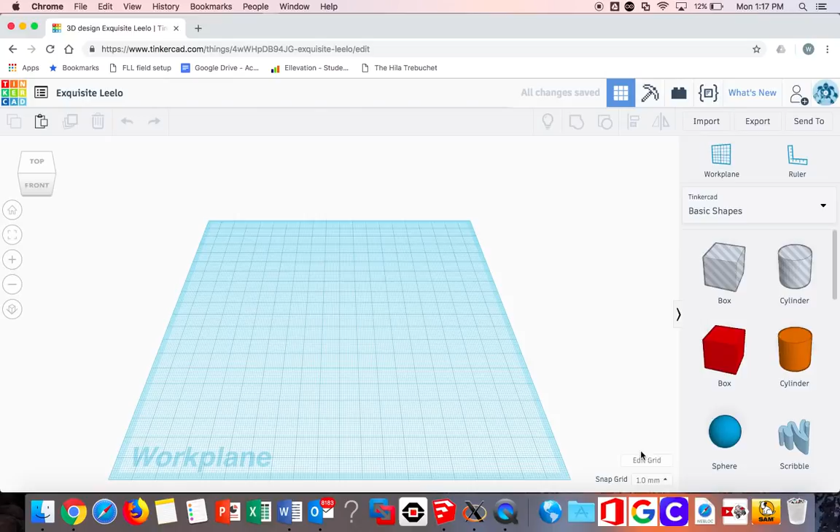Create a new design. We're going to set up your Tinkercad file by editing the grid, changing millimeters to inches,

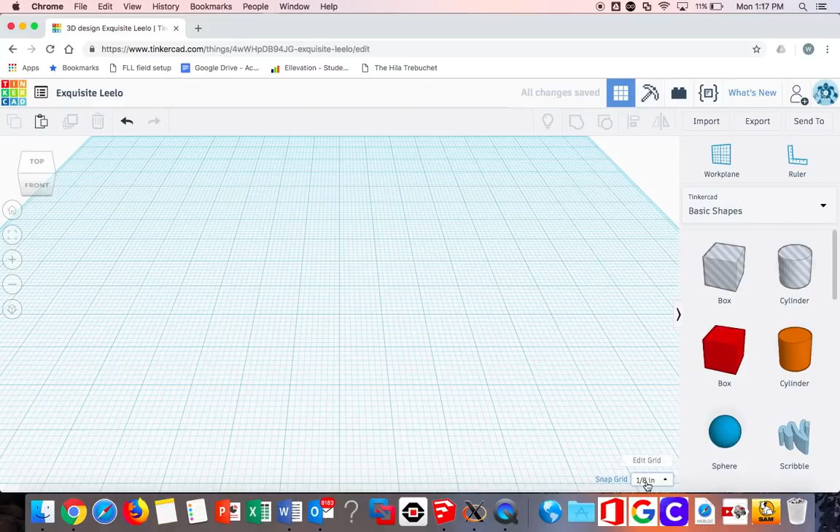and give yourself a work plane that's 20 by 20. Update grid. Make sure down here the snap is 1/8 of an inch, and it might help to use a mouse.

First thing you're going to do is drag out a box and just make it bigger. When you scale your box, the easiest way to do so is to click on the dimensions and type in whatever it is that you want. In this case, I'm going to make my jewelry box 8 inches by 8 inches and hit enter.

That looks good. Next, we're going to duplicate it, and that made an exact copy of my original box.

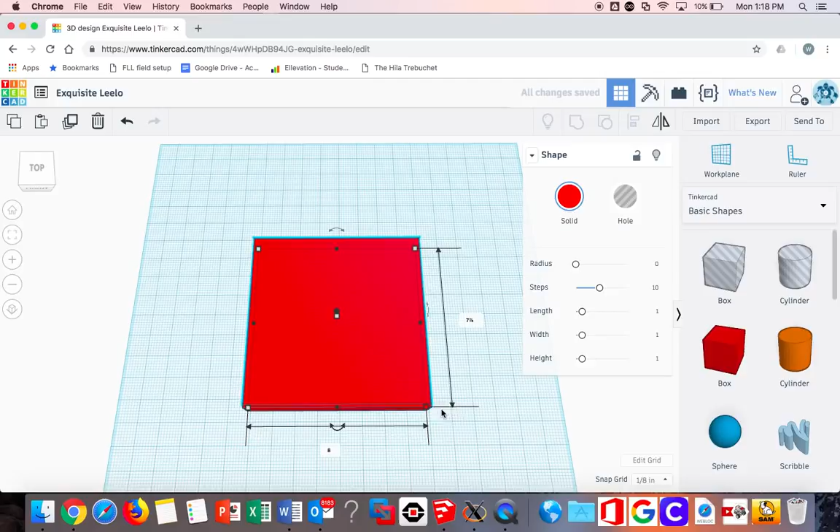So what we're going to do is push in the sides 3/8 of an inch, giving them correct thickness. Three-eighths of an inch is exactly 3 snap units.

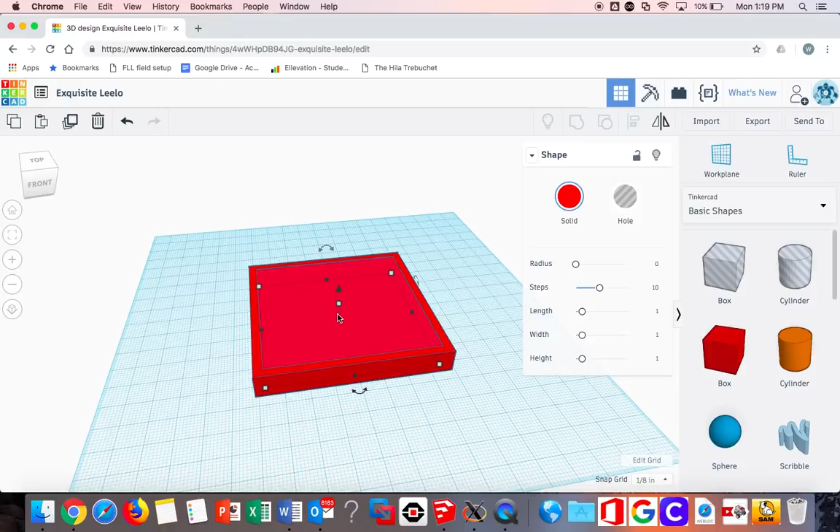Make sure everything looks even. Make sure you have your inside box selected. Make it a hole. Raise it up a little bit. Grab the little cone and make sure that it pushes all the way through your box. Make sure everything's nice and even.

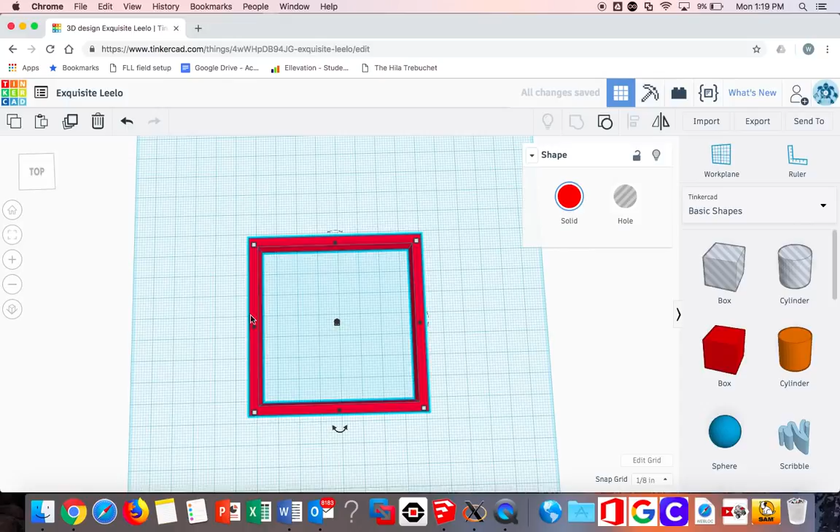Select it all. Click group. Here's the outside walls of your jewelry box. You can scale it from now on to meet whatever the criteria are or the goals for your jewelry box.

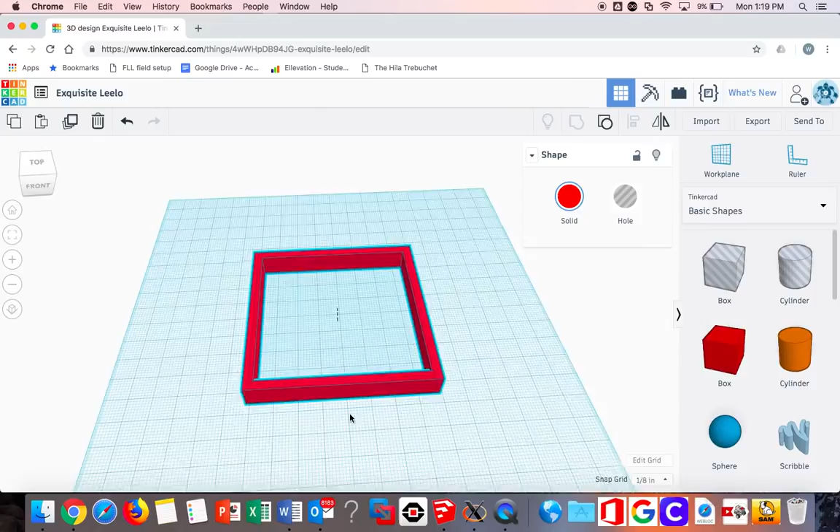So what we're going to do now is focus on the height. I'm going to make mine 2 inches. You can make yours whatever height you want. Make sure to have a ruler sitting next to you, so when you prototype and test out different ideas, you can make sure that they're going to be the right dimension.

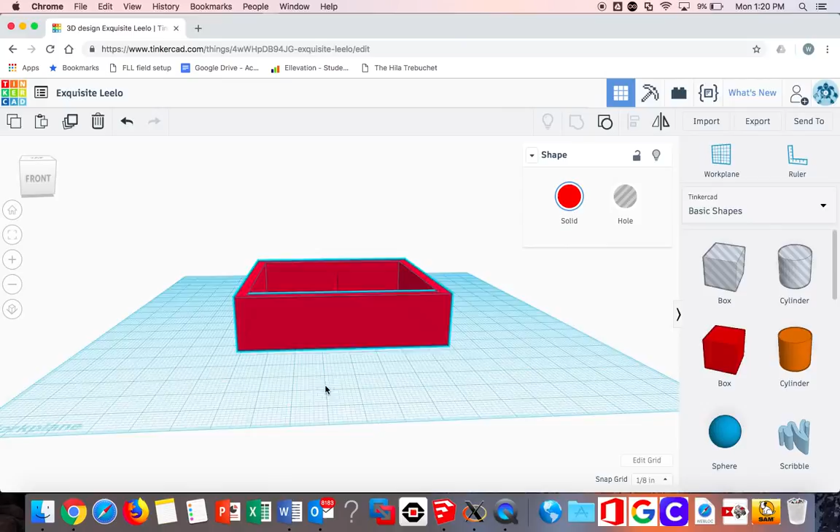I'm going to put in some dividers. Pulling out a box, making it only 1/8 of an inch thick, and stretching it out. You can use the arrows to go ahead and move your dividers around.

Your dividers can be arranged in any which way you need, depending on what you're designing your box for and what your client needs. What are their criteria?

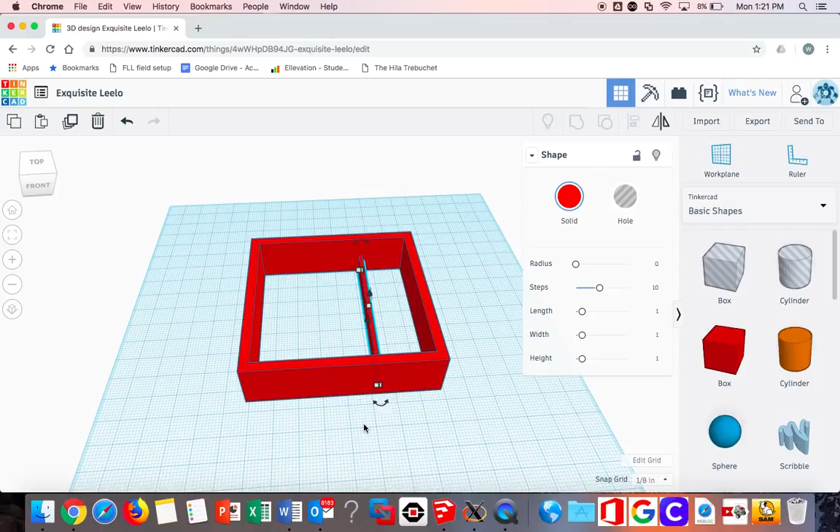Make sure to have your dividers be even with the wall. Try not to have them pushed in. We're going to be using this as a blueprint to build your design. So when you slide your dividers in, make sure that they're the same length as the interior length on the inside. So I'm going to raise them up a little bit.

I'm going to make my dividers be 1.5 inches tall.

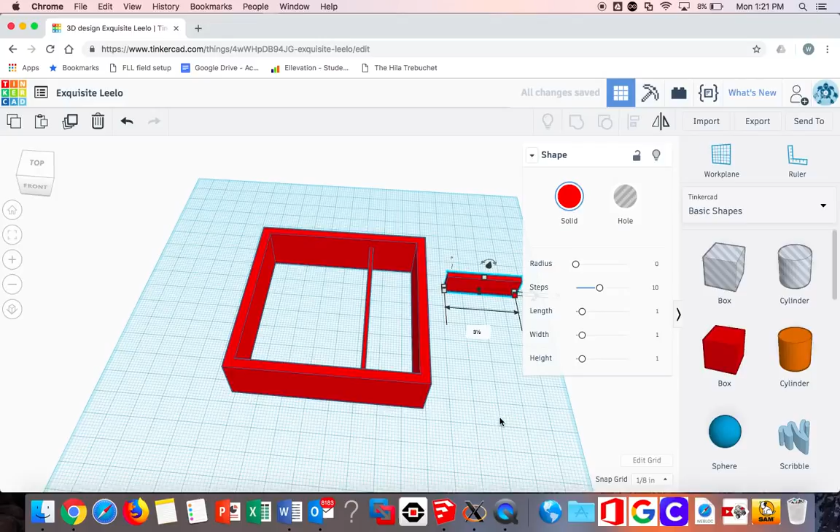Going to pull out another piece and make another divider. Again, I'm going to make it 1/8 of an inch thick. And you don't need to be too concerned with getting the size of it right until you park it inside your box.

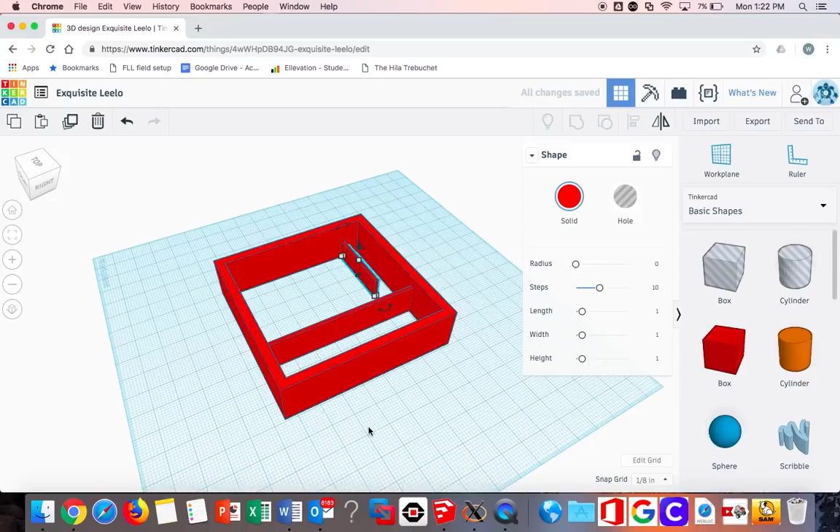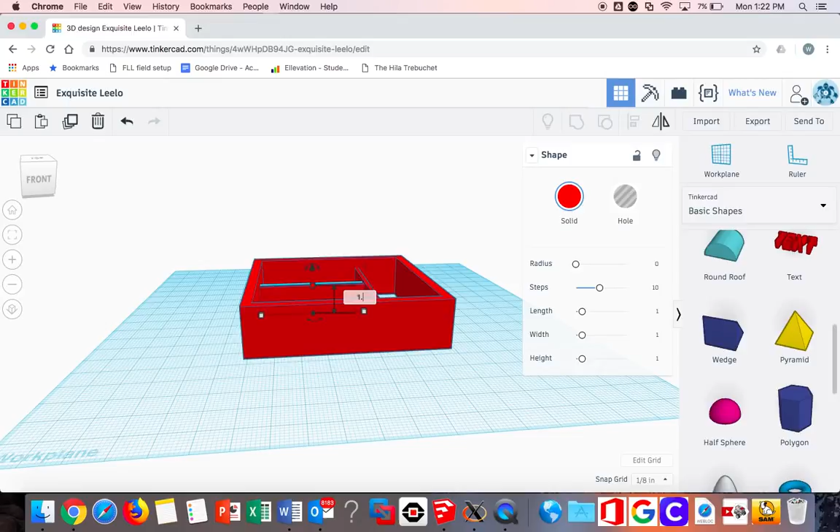The arrows are really helpful when moving your divider around within your model. Again, I'm going to make this 1.5 inches tall to match the height of the other divider.

So you're probably going to want a few more dividers than this, but I'm going to show you what to do in the next step.

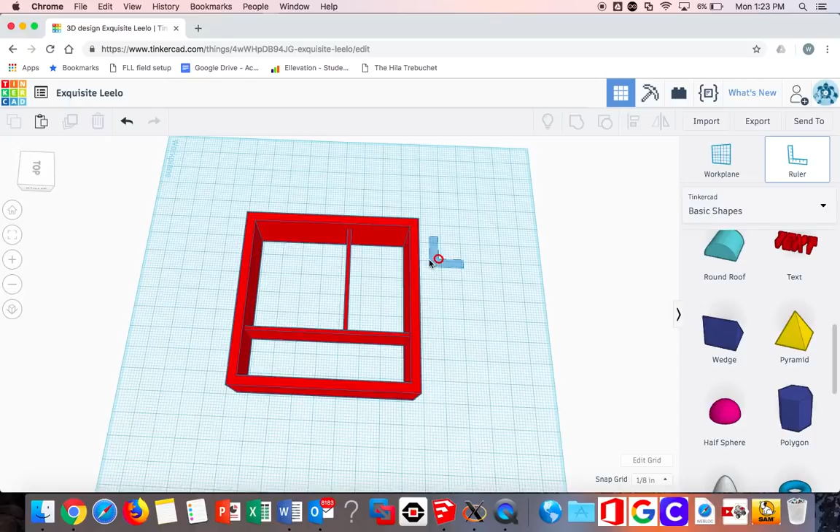After you have come up with a working prototype that meets the criteria of your project, keeping in mind the constraints as well, you can use this ruler function to verify and just make sure that you have enough room for your jewelry. Make sure that you have the correct length and width of each of the specified sections of your box.

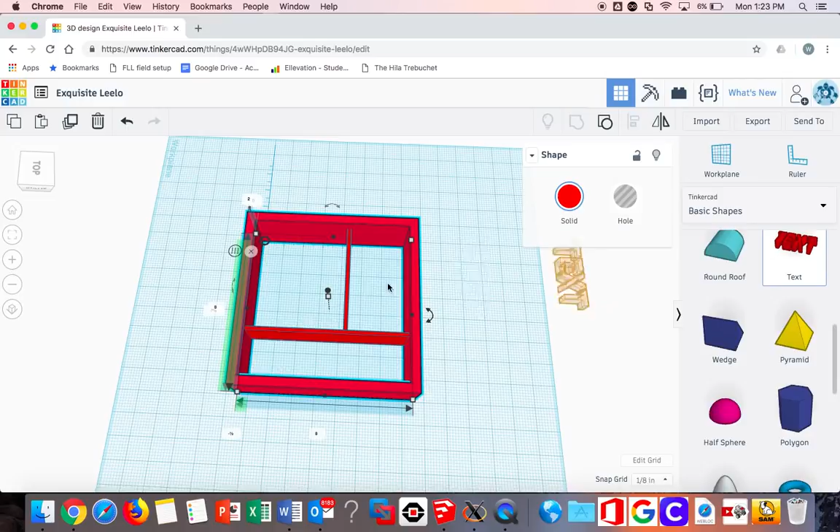Next, we're going to grab out the text function. And we're going to make sure that we label each section of your box with the name of whatever item you're putting in there.

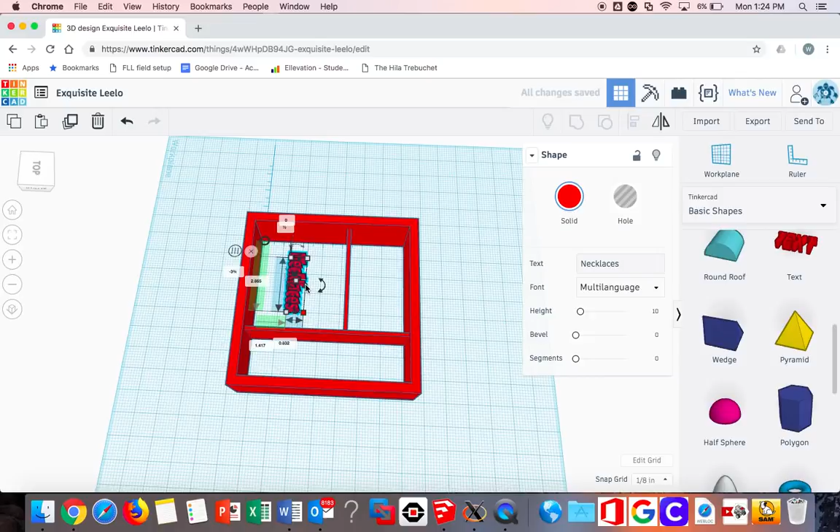Don't worry about size yet. You can always scale it later. Use your arrows to move the word around. Label each section so that we know what belongs in it.

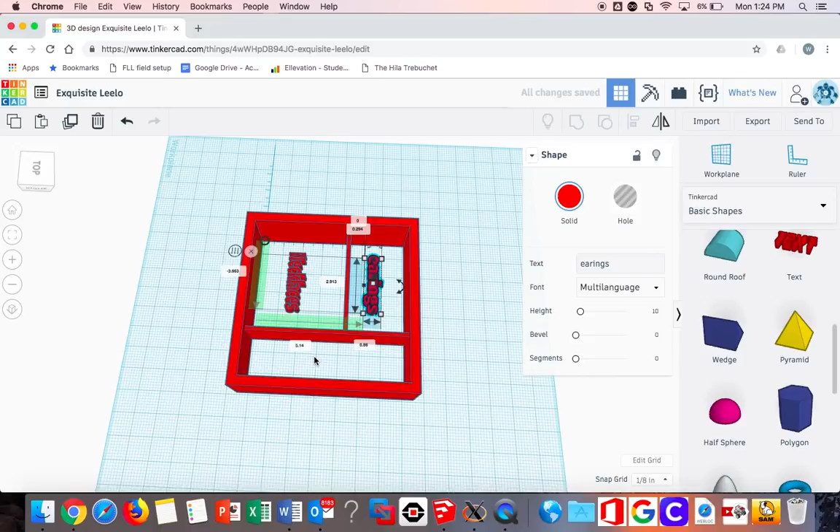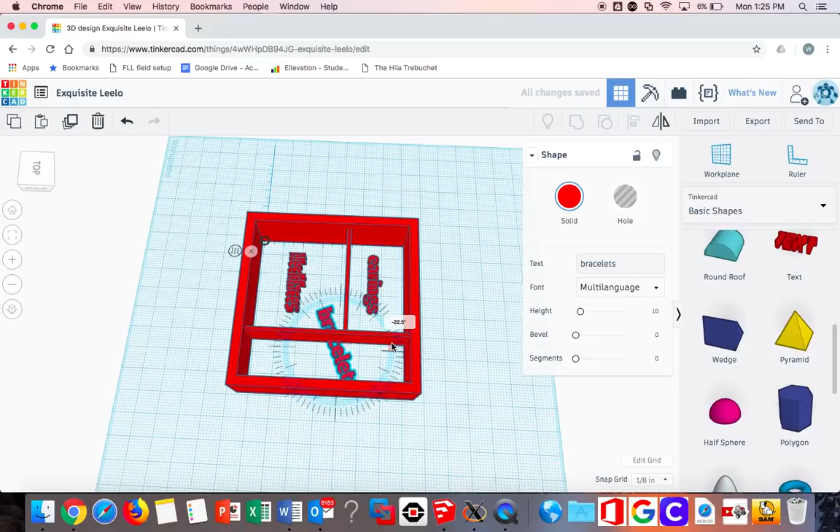If you hold the Shift button while pulling on the handles, it'll scale your word proportionately. Use the rotating function to get the proper orientation of your word.

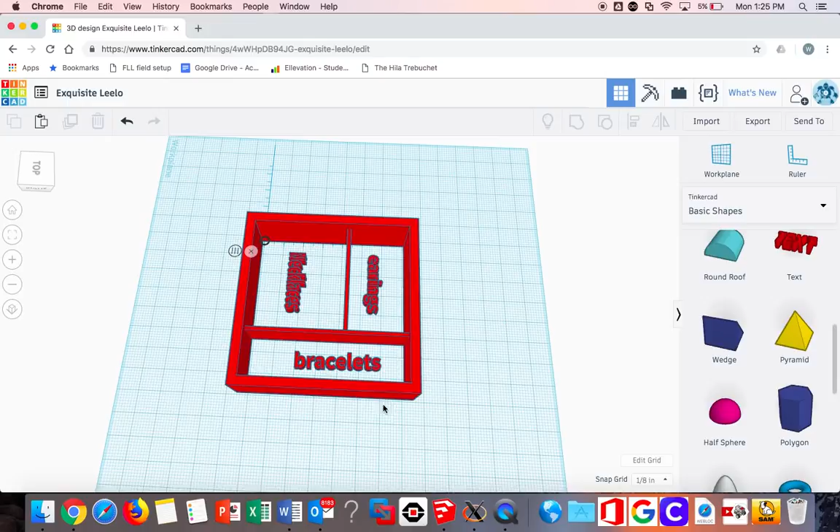Once you have scrutinized and proved that the pieces you're designing your jewelry box for will fit in these sections and that your goals of your client are met, then it's time to make sure that everything is laid on the ground of the work plane.

If it's not, click on it and use this black cone to raise it along the z-axis. Make sure that you don't have any junk on the outside of your box. When you're ready, you're going to export it as an SVG file.

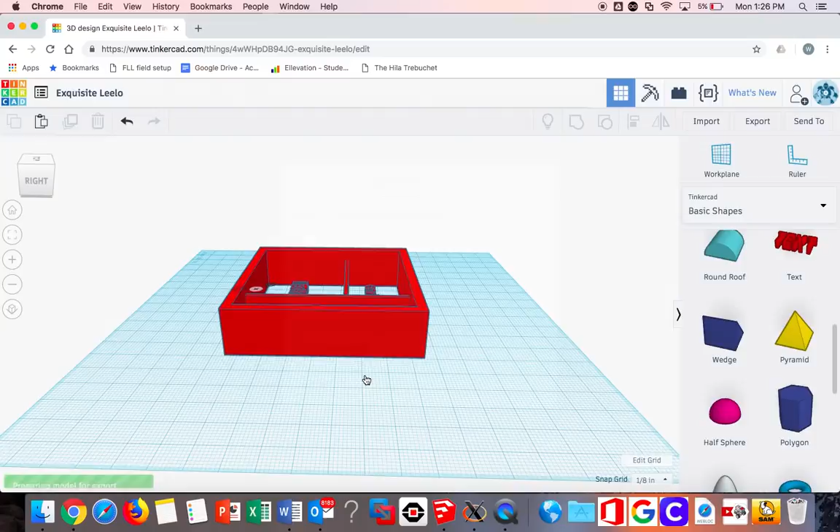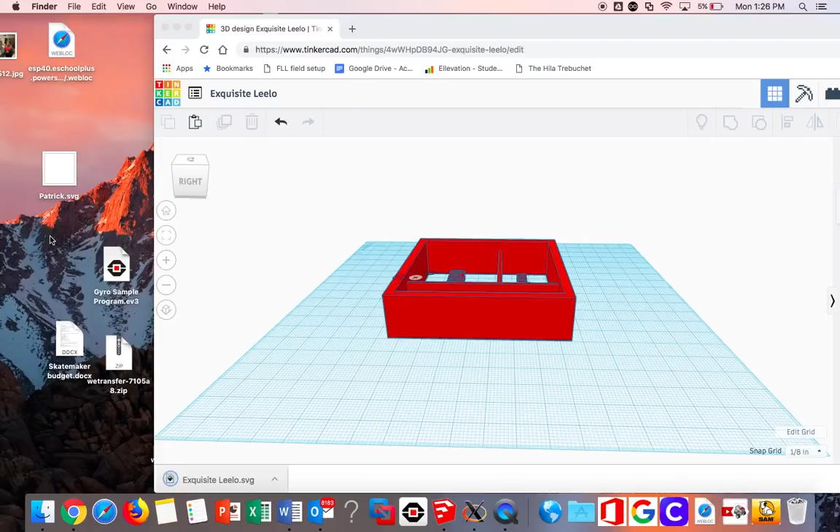Take the file, drop it on your desktop. Feel free to rename it. And open up Inkscape.

What we're going to do now is export the SVG file from Tinkercad and import it into Inkscape. Go ahead and open up your file, which should be on your desktop.

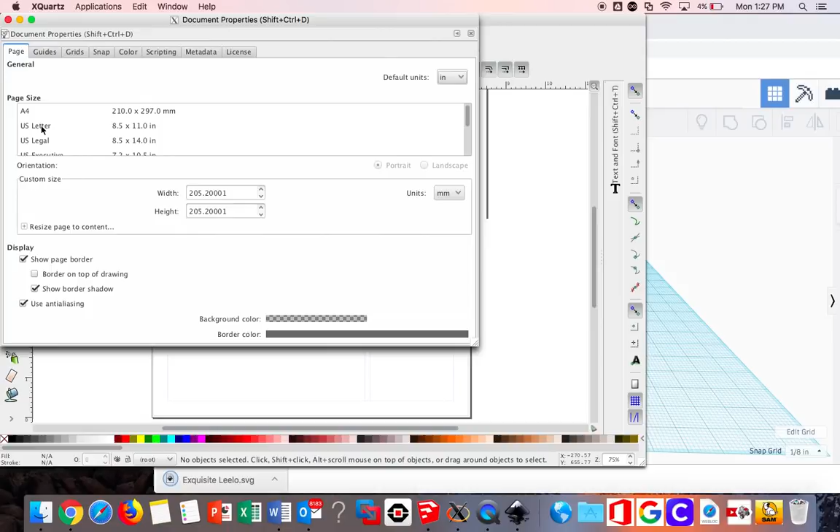Next, we need to set up our document. The way we're going to do that is click on File, Document Properties, change the default units to inches, and change the paper size to US letter. Close out of it.

Next, click on your design. Make sure that it's centered on the paper.

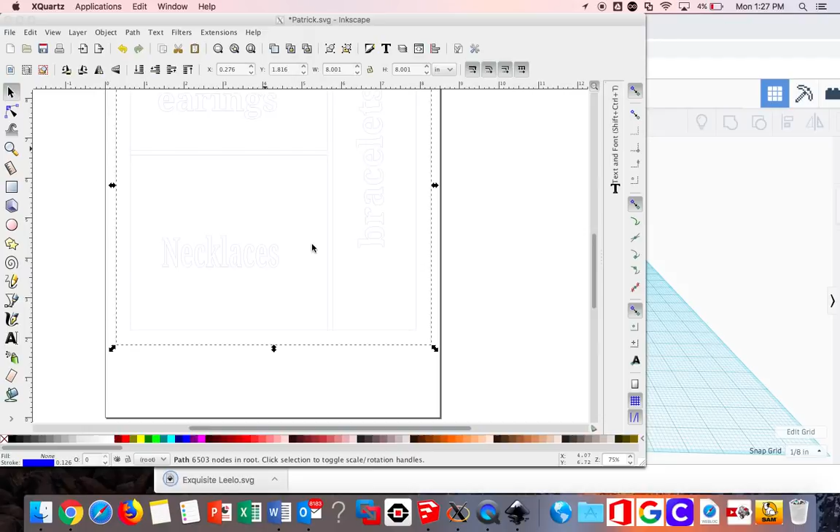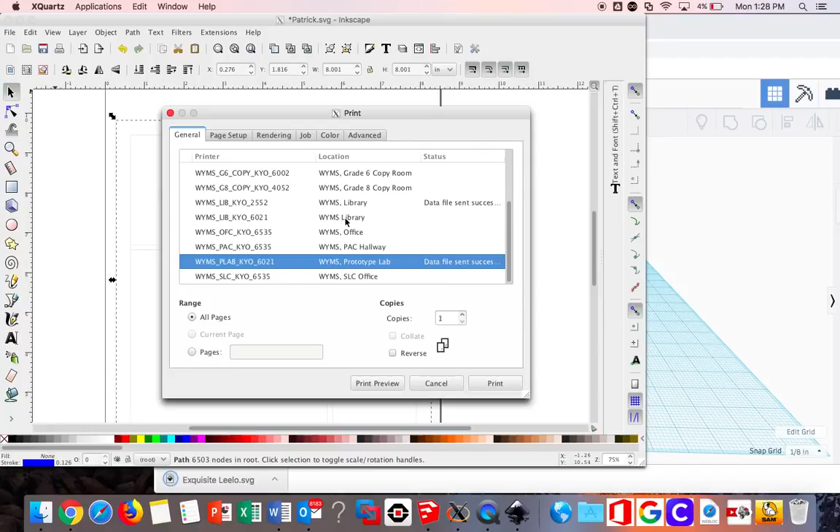PLAB, print, and go pick up your printed blueprint in the prototype lab. From here, you're going to add on with a ruler the dimensions of your outside walls and the dimensions of your inside dividers. Thanks for watching.